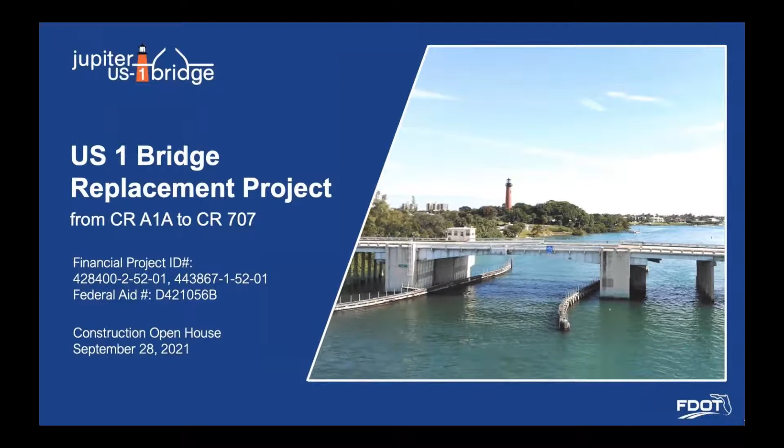The following presentation will provide you with information on the upcoming improvements that include replacing the US 1 bridge, improving intersections, and making minor repairs to the alternate A1A bridge. You will find out what to expect during construction, including the project schedule and traffic impacts. But first, we will introduce the project team, go over the meeting format, and the rules of engagement.

Please meet our project representatives who will be addressing your comments and questions after the presentation. Bodler Barthelemy is the FDOT project manager. Virgil Visaggi, Scott Case, and Tony Grau are members of the team that will be overseeing the contractor on behalf of the department. Angel Gardner is the community outreach specialist who will provide ongoing information to the public on the project's progression. Also with us tonight is Bing Wang, FDOT's design project manager, Mike Salino and Sybil Bayard, the engineers of record, Steve Hedge with the design team, and Kyle Humphreys, the contractor's project manager for this project.

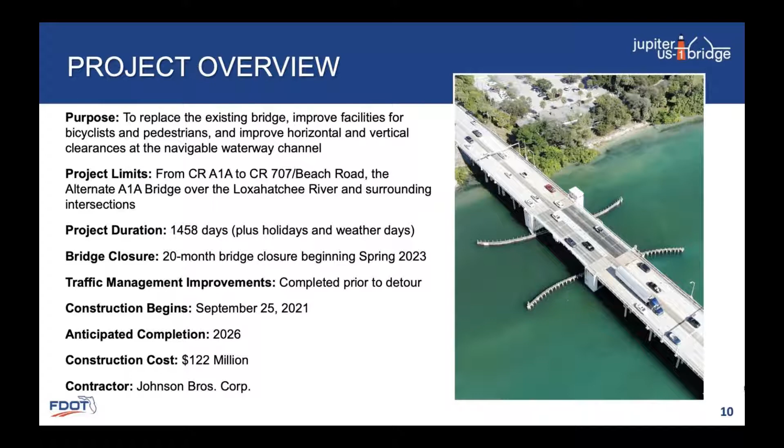To limit the duration of bridge closure, FDOT is providing cash incentives to the contractor to end the detour in less than 20 months and open one lane of traffic in each direction on the new bridge. The contractor also faces disincentives if the detour exceeds 20 months. In addition, no excuse bonuses are available to the contractor to open 2 lanes of traffic in each direction by November 2024 and to complete the project within the original allotted time.

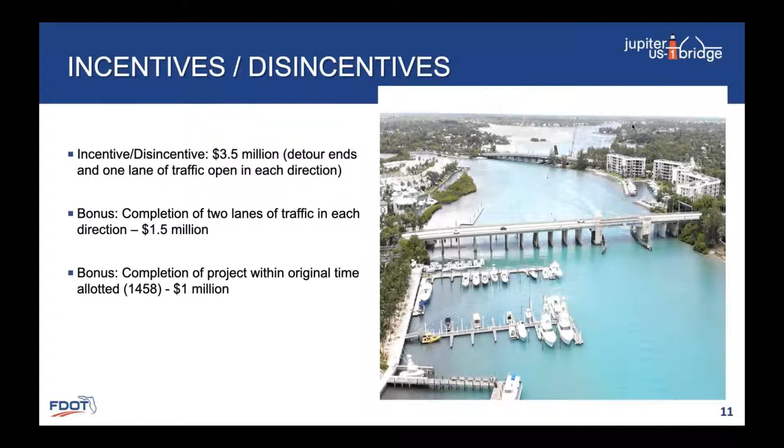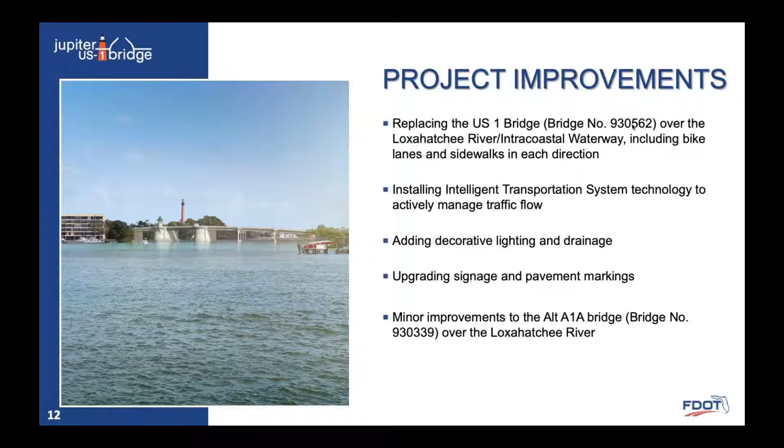The US 1 bridge replacement project consists of replacing the 4-lane drawbridge, including sidewalks and bike lanes in each direction. Improvements also include installing intelligent transportation system technology to manage traffic flow. New decorative lighting and drainage will be added. Signage and pavement markings will be updated. Minor repairs will occur on the alternate A1A bridge over the Loxahatchee River.

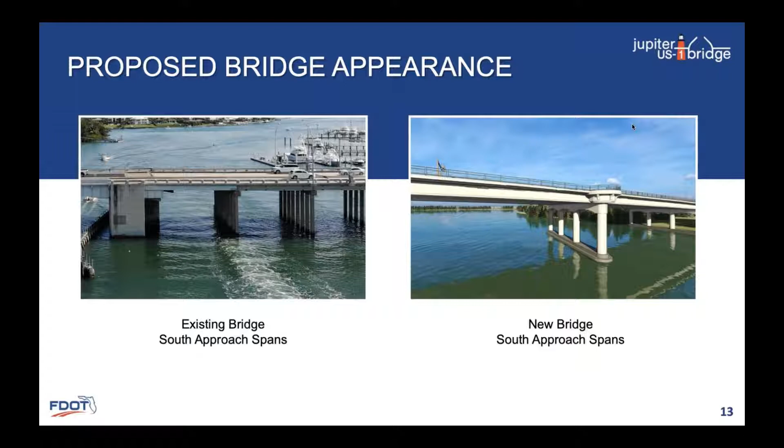The proposed bridge will feature fewer intermediate piers. This will provide an elegant, open, and cleaner appearance with less visual obstruction of the channel and surrounding area. Fewer bridge piers will help improve channel flow and reduce erosion.

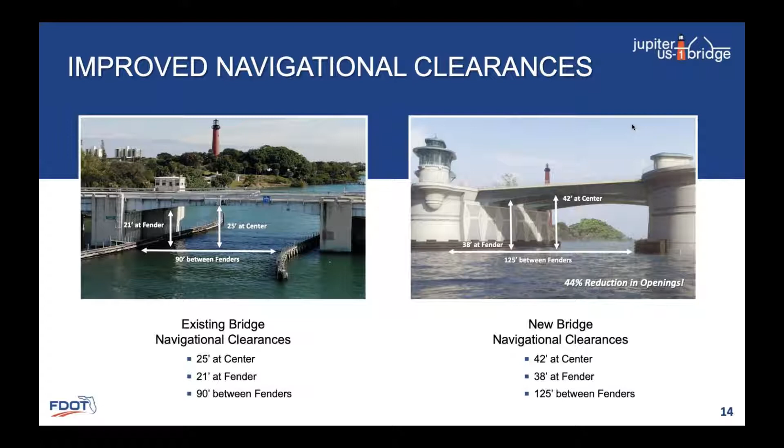The new bridge will provide improved navigational clearances at the channel, with 125 feet of horizontal clearance and up to 42 feet of vertical clearance. The higher vertical clearance will result in an approximately 44% reduction in bridge openings, improving traffic flow on US 1. The new bridge will also feature a concrete bridge deck to reduce traffic noise.

Protected pedestrian walkways with overlooks will be included, connecting the Riverwalk to the Jupiter Inlet Lighthouse and Museum. A new observation deck will be constructed under the replacement bridge.

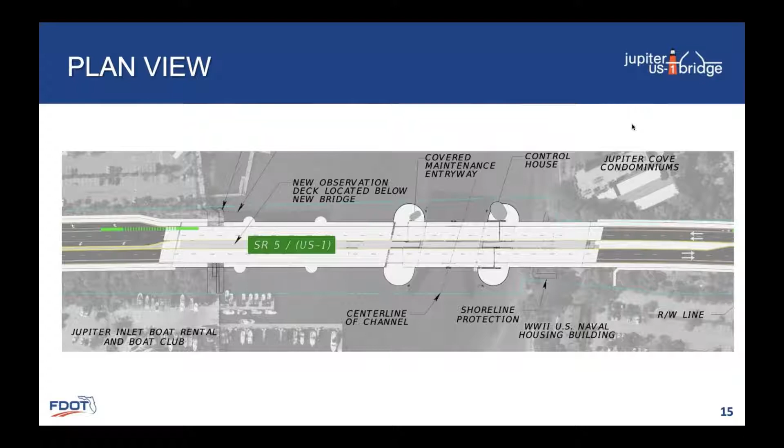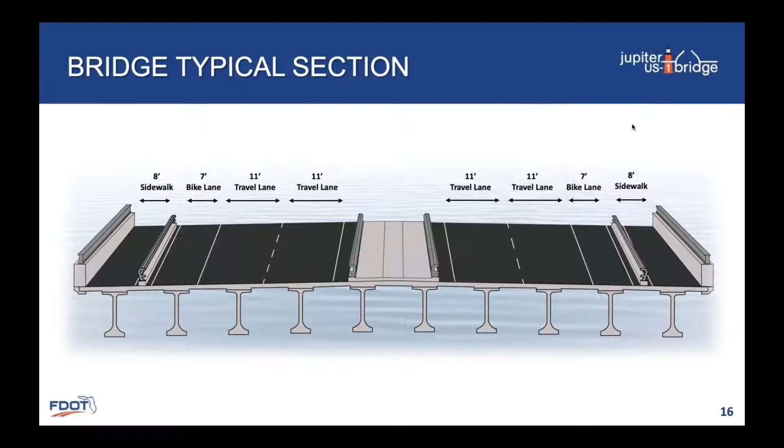The US 1 bridge will be closed for approximately 20 months, beginning in spring 2023, with traffic detoured to alternate A1A. Lane closures may occur 9:30 p.m. to 6:30 a.m. Sunday through Saturday on US 1, Indiantown Road, alternate A1A Beach Road, and Old Dixie Highway.

Access to adjacent properties will be maintained. Pedestrian and bicycle access will be maintained along the detour route. Marine traffic will be maintained through the navigable waterway. Channel restrictions may occur.

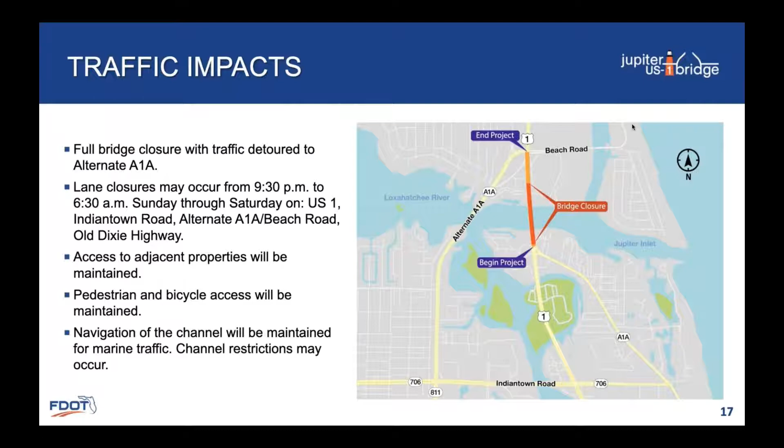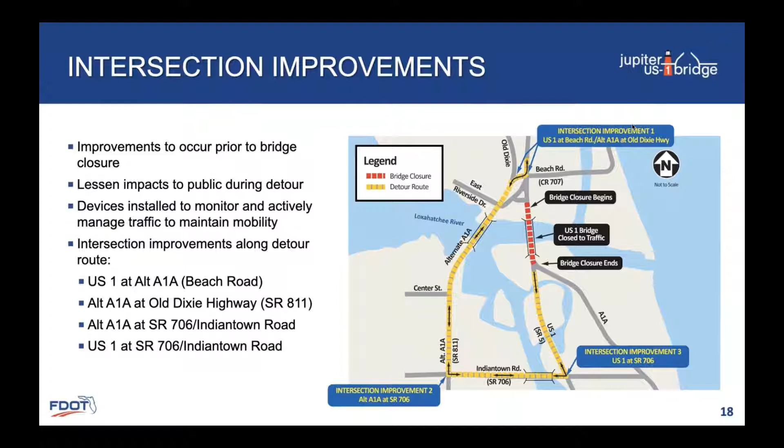Here is an overview of the intersection improvements that will occur along the detour route prior to the bridge closure. Intersection improvements will occur at US 1 and State Road 706, Indiantown Road, at alternate A1A and State Road 706, Indiantown Road, and at alternate A1A and Old Dixie Highway. Traffic management devices will be installed to actively manage traffic and maintain mobility.

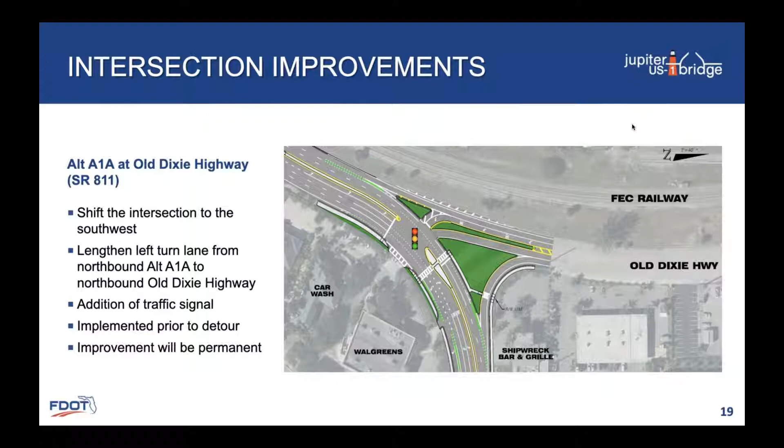Permanent intersection improvements will occur at alternate A1A and Old Dixie Highway, consisting of shifting the intersection to the southwest, lengthening the left turn lane from northbound alternate A1A to northbound Old Dixie Highway, and adding a traffic signal.

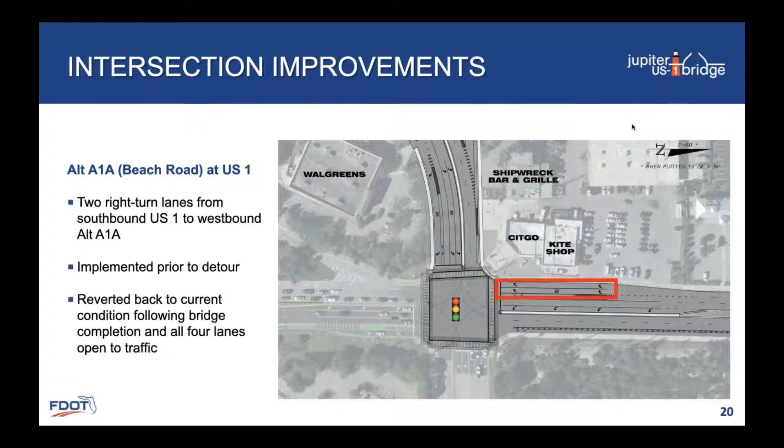The temporary intersection improvement at alternate A1A Beach Road and US 1 consists of adding a second right turn lane from southbound US 1 to westbound alternate A1A. A temporary third left turn lane will be added from northbound US 1 to westbound Indiantown Road at US 1 and Indiantown Road.

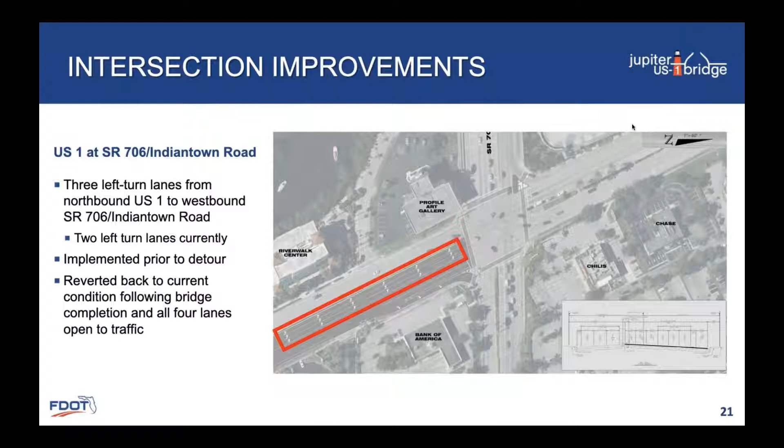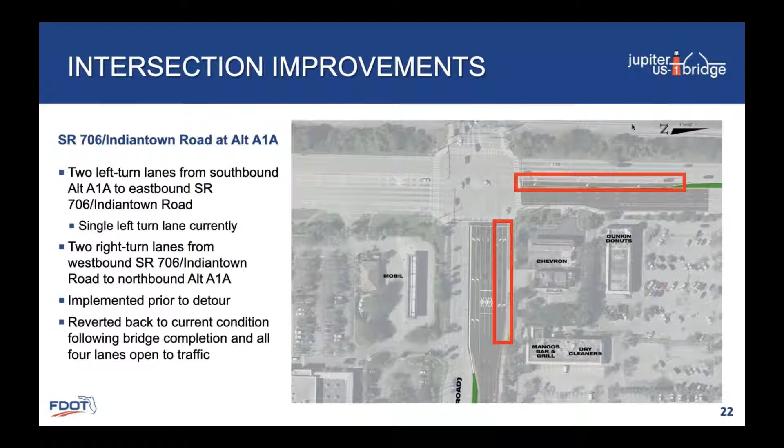The temporary intersection improvements at Indiantown Road and alternate A1A consist of adding a second left turn lane from southbound alternate A1A to eastbound Indiantown Road, as well as having two right turn lanes from westbound Indiantown Road to northbound alternate A1A.

Active traffic management and monitoring will occur along the detour route with the installation of intelligent transportation system devices. These enhancements will allow FDOT and Palm Beach County to monitor traffic 24/7. The ITS system should help improve travel times, alleviate congestion, allow real-time adjustments to traffic signal timing, and allow advance notification to the public of traffic delays.

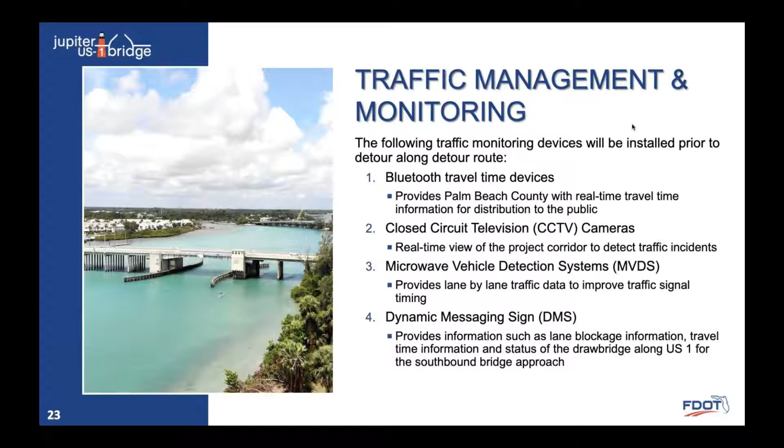Prior to the US 1 bridge detour, minor repairs will be made to the alternate A1A bridge over the Loxahatchee River. There will be no impact to marine traffic during the repairs. Lane closures will occur.

Detour and work zone signs will be placed north and south of the work zone. Residents should anticipate increased noise levels during pile driving activities. The Town of Jupiter noise ordinance will be followed.

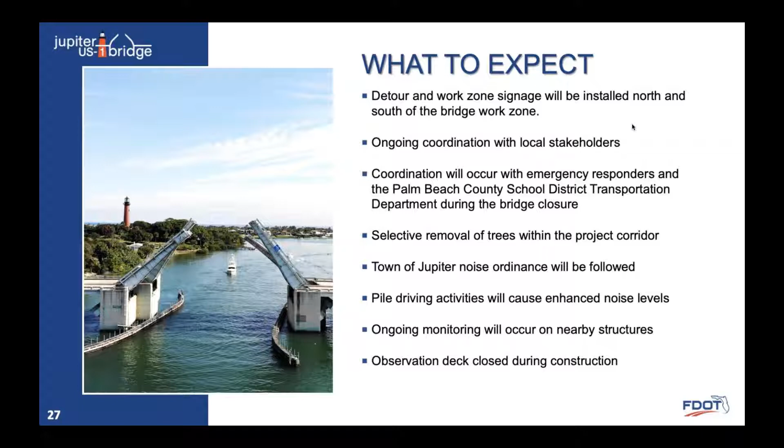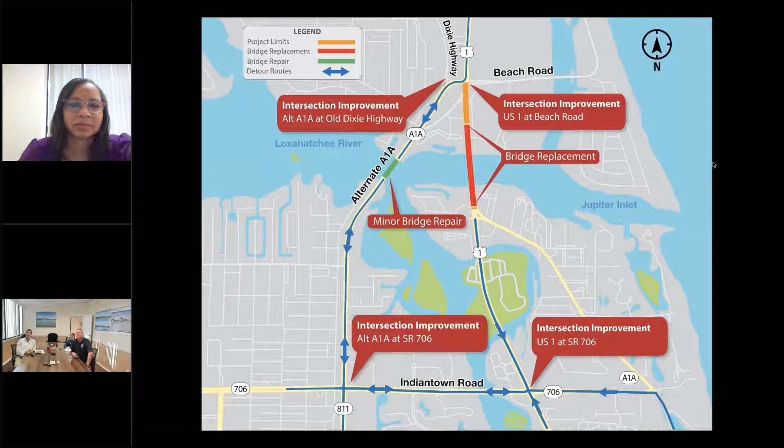Sure, so if I understand the question properly, diagonal was the word used, is that correct? Yes. So assuming the questioner is referring to relative to the channel, right? He's asking about the channel, yes. So can you bring up a slide? Let's give an opportunity for some pictorial reference here, if you can. So it must be relative to something shown in the virtual presentation. So let's have a look to see what might be a question.

So the new bridge—Mike, I think you're referring to the intermediate piers. So if you pull up the attachment, the rendering, then you could talk to that. Yes, I have it up on my other screen.

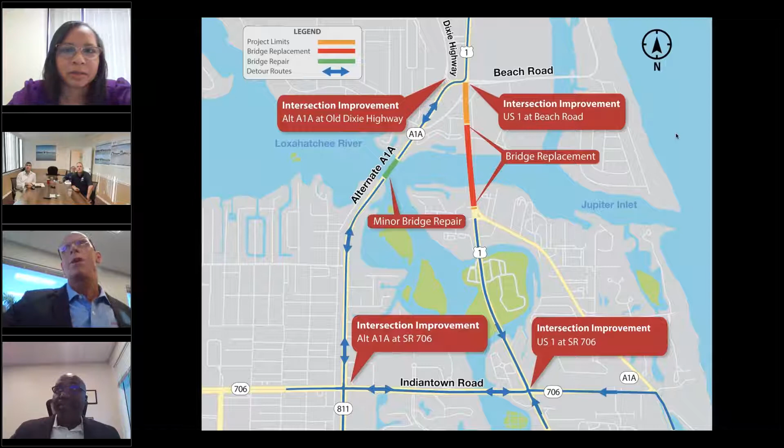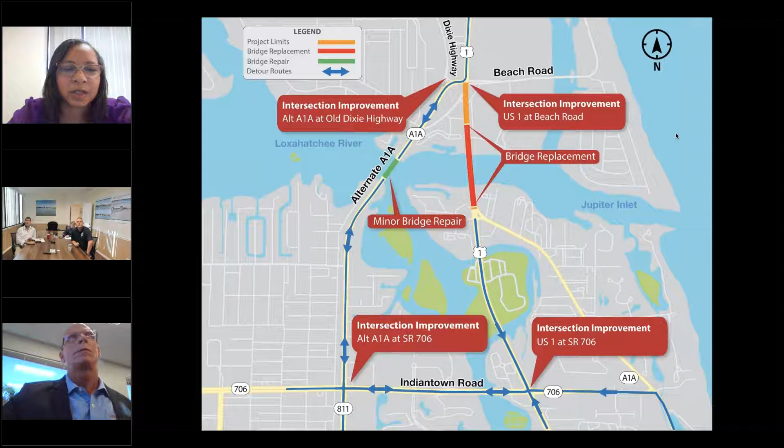So he has a follow-up question as well, Mr. Smith: are there any underwater obstructions between pylons that would prohibit navigation outside the channel?

So there we go. The U.S. Coast Guard encourages use of the navigable channel. One of the things that's going to occur prior to the detour phase and prior to demolition of the existing bridge is to remove some of the old remnants of the pre-existing bridge that might still be there, or whatever else is at the bottom of the channel. Our team did a bathymetric survey during the design phase, identified some of the objects that might be on the bottom of the channel and the river in general near the bridge, and those items will be removed and cleaned up. Again, the navigable channel is really what vessels should be using to pass through. But to answer your question, debris will be cleaned up from the bottom of the channel.

Now, during construction, we have divers going in the water, I want to say in about two weeks, just to verify everything that's in the water so we can tell the contractor to remove it. Then at the end of the project, we're going to have divers again to ensure there's nothing remaining in the water or that the contractor did not drop anything. So to answer the question, there'll be nothing preventing boaters from going outside of the designated channel by the bridge, underneath one of the intermediate piers.

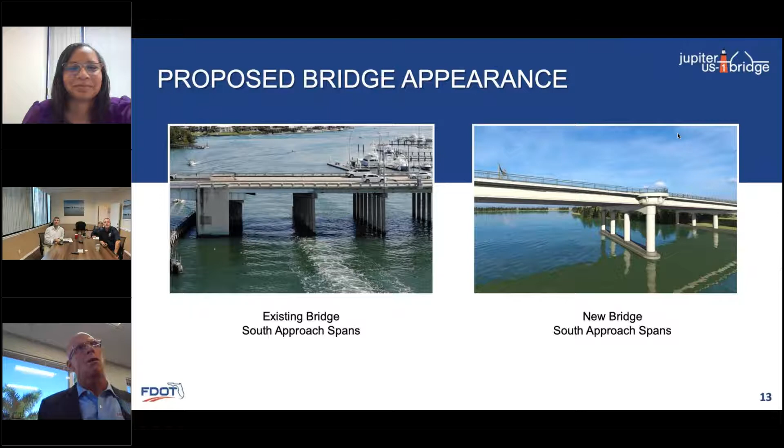Yeah, I realize that now, Steve. Thanks. I think the questioner was asking why the piers are slanted, or the angle of the piers in line with the flow of the channel, and that's exactly the purpose. That's to improve the flow—it's a hydraulic design improvement. It's a goal you want with a new bridge design.

And the piers are rounded, for your information, just to help with vessel collision design in the new bridge. The rounded edge gives it better vessel collision resistance, able to withstand vessel collision better and protect the vessel and the bridge.

Okay, I hope that answered your question, Mr. Smith. Let us know, and if we need to come back, we'll come back to you. But thank you for those responses.

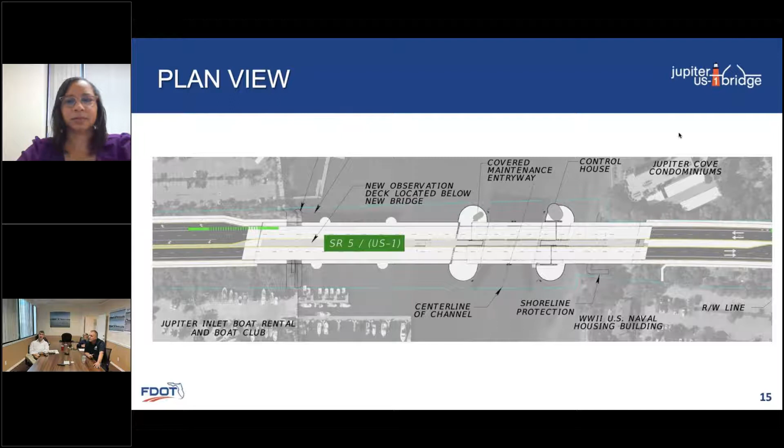Yes, the town actually has two upcoming projects, one on Indiantown Road and one on County Road A1A. Those projects are going to be started early next year based on our conversations with the town. They are supposed to be finished in early 2023, with the majority of their work done by the time we get to our detour phase. There may be slight overlap, but it shouldn't affect the flow of traffic along Indiantown or through alternate A1A. And I'm sure we'll be coordinating with the town as those projects are progressing. Correct.

Okay, thank you for that. Our next question we have is from Sheldon Geweiser, please excuse me if I pronounce your name incorrectly. Sheldon asked: please tell us exactly what changes will occur on the entrance to 1000 North properties, including the condominiums and townhomes. What elevation changes will be made to the road and what will be done to improve the drainage? I know that's a very important concern for the folks at Jupiter Harbor.

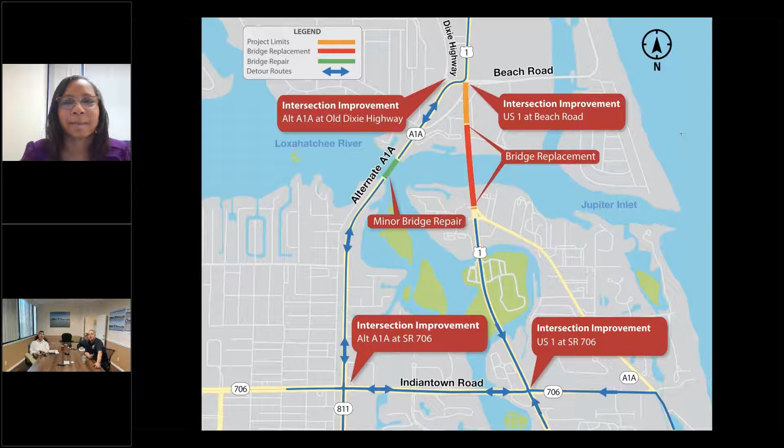Virgil, can you or Scott address that? I'll let Scott address it. So while the Jupiter Bridge, the new bridge, will be raised at its main span location, it will slope down gradually back to grade on both the north and south sides. At 1000 North, the vertical change will be minimal, but you will see an MSE wall from the landing going towards the bridge to address the rise. But at the entrance to 1000 North, we should be back at grade by that point.

And the drainage improvements that we're doing for the entire project are actually there to improve the water quality for the entire system and surrounding area. Because right now, currently, the water on the existing bridge drains through scuppers that go right into the Loxahatchee River. Our drainage improvements will capture that water from the bridge, from the traveling public, and route it down to new drainage swales that will treat the water before it gets discharged back into the Loxahatchee River. So that's how we're improving water quality on the project through our new drainage improvements and addressing the vertical rise with the MSE walls, sloping it back down to grade.

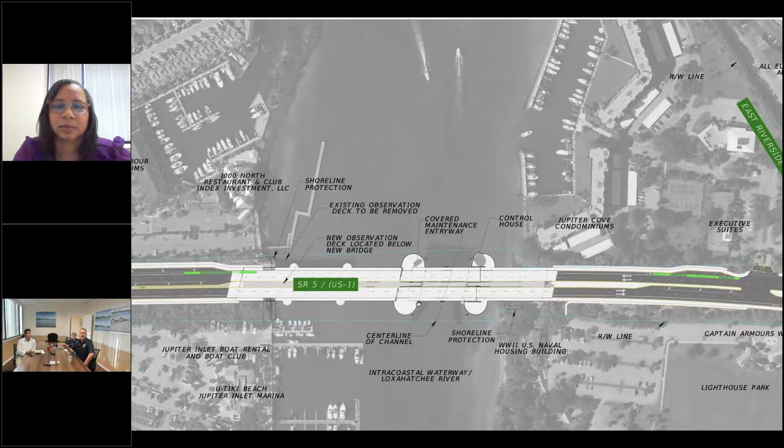Next to the Jupiter Cove condos, as you come off the bridge, the reason there's not a noise wall per se is because there's going to be an MSE wall taking traffic down from the bridge at that point and down to grade. That itself acts as noise protection, along with the existing vegetation between the existing structure, which is basically getting put back in the same footprint. So between there and Jupiter Cove, that combination is why there are no additional walls being built at that location.

It's mainly because it did not meet the requirements of the noise study to put any further noise abatement at that location. One improvement DOT is doing that relates to noise is putting a closed bridge deck on the bascule trestles. Right now, if you're on your patio at the condo, you get a lot of noise from the open grate out there. We're going to close that off, so you won't get that huge tire noise you presently get — it will actually be a reduction.

Thank you for that. So when you say MSE wall, Scott, what you mean is like a retaining wall, basically — is that correct? That's correct.

I believe what Ms. Capodanno was referring to is why isn't the MSE wall extended further south so they have some privacy between the bridge abutment and their condos, located at the easternmost part of Jupiter Cove. The MSE wall has to be designed to take tidal surge, so we had to pull back the abutment and walls as far as we could while still providing some privacy to Jupiter Cove. There was a give and take between design standpoint and potential coastal surge situation.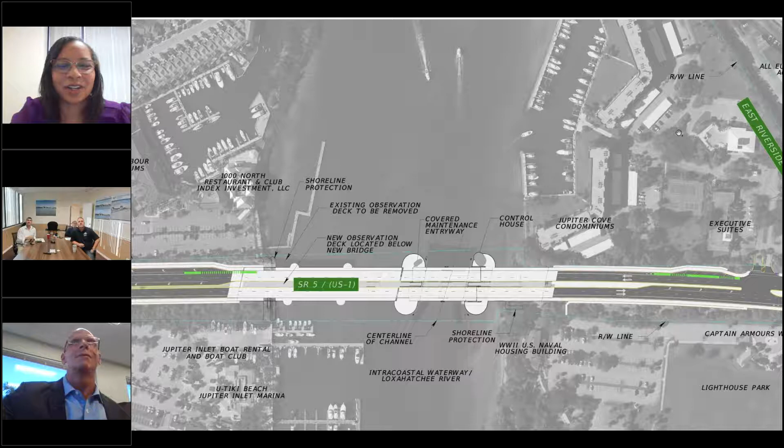We have another question here from Ms. Riccardi again: what is the proposed pile driving method for installing the bridge piles? There's someone else who knows what they're talking about. Virgil or Scott, can you address that? What was the question, I didn't hear. Pile driving method - what's the proposed pile driving method for installing the bridge piles?

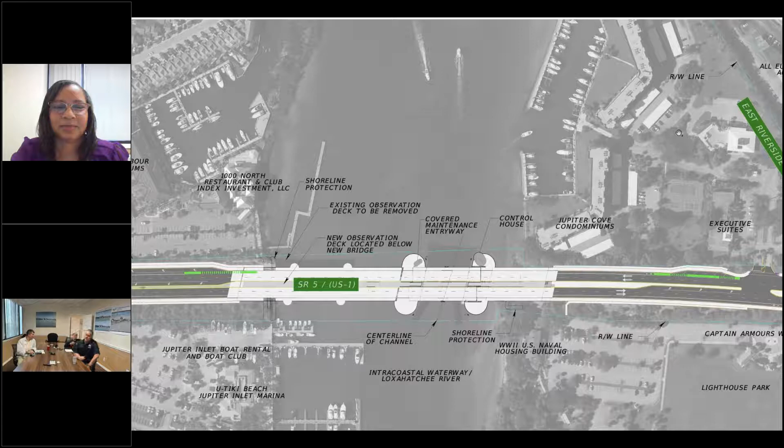Well, let's roll this back for a second. There are two different foundations on this bridge - we have drill shafts and pile driving. Tony, you want to go through in detail? Yes, the drill shafts we're going to be installing on what I guess will be the north abutment, and those are just going to be strictly for the north abutment.

The rest of the bridge will all be driven piles. We're going to excavate and drill down to an elevation that will minimize vibrations as we drive the piles. So safety and vibration monitoring are key to maintaining the existing structures, so we don't cause any damage to them.

So what he was saying is we're going down to 55 with the casing. We're going to drill all the material out of the casing, place the pile in the case, probably drive it 20, maybe 30 feet from there, take the case out, and now fill all the voids with clean sand. That's going to be the majority of what you see happening out there at all the piers in the waterway.

So will that pre-drilling help with, like Tony mentioned, reducing vibration? What about noise? Will that make any difference?

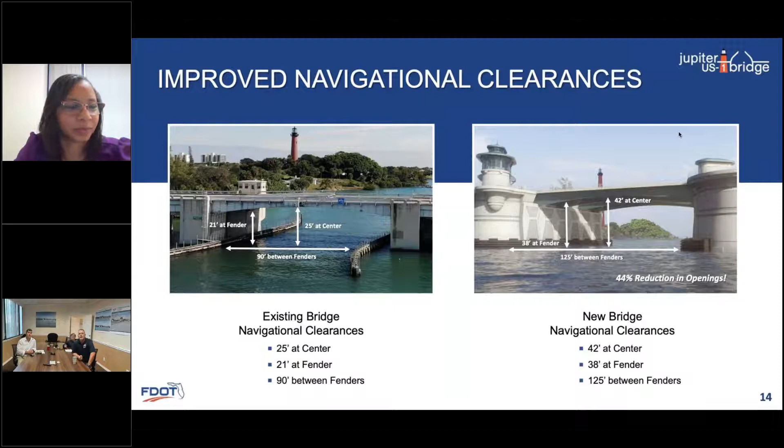Yes, it will, because a lot of what you're drilling through, when you put the piles in the ground, you have to have a certain depth for lateral stability of your foundation. And in order to get down to those depths we need, there are a lot of soil layers you have to go through in order to consider bearing. Some of those layers have some hard driving through them. So we're going to be drilling through that so it minimizes noise, minimizes vibration, and the only impacts you're going to feel are when we're actually in the layers we're considering for bearing.

But as far as vibration, obviously the deeper we go, the less vibration impact you're going to feel. But you will still hear the noise of the hammer as we're driving a pile. That we can't change. The duration is shorter though. Instead of hearing a 20-minute or 30-minute duration of hitting on a pile, you're now going to be going 10 minutes or so, for example.

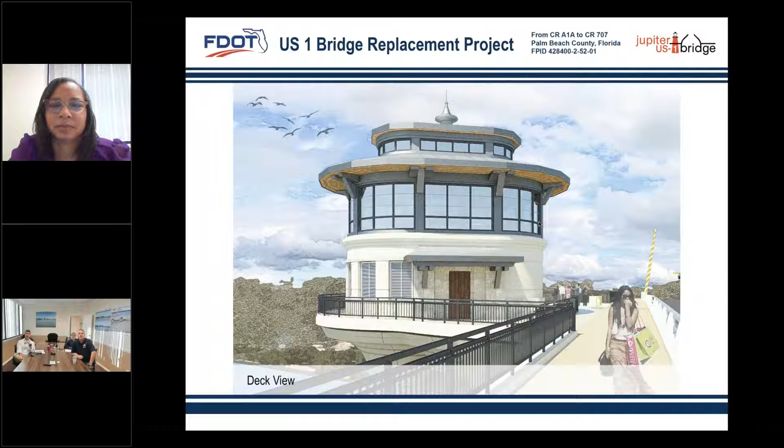Yes, the observation deck will be demolished and turned into an artificial reef out in the ocean. We will be putting a new observation deck underneath the bridge itself, which will be connected to a new river walk that we'll be developing. That's a good rendering right there of the new observation deck that we're putting in.

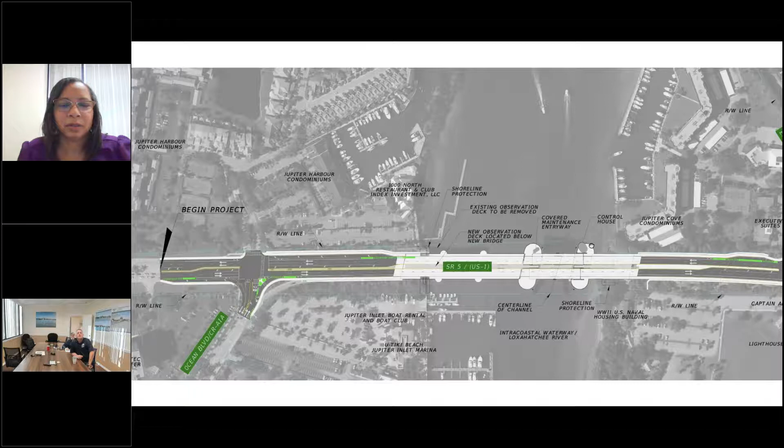Another question here, just give me a second, the system is a little slow so I'm trying to scroll up. This is from Richard Bavilo, and it's a long question: I live on Village Boulevard. Has a traffic study been done as to the impact this project will have on residents traveling west on Village Boulevard, trying to make a left turn onto Dixie Highway?

Vehicles traveling south on US 1 from Hobe Sound will be making a right turn onto County Line Road and then a left turn onto Dixie Highway to avoid the US 1 traffic. Without a stop sign or light at Dixie Highway and Village Boulevard, it will almost be impossible to turn left from Village Boulevard onto Dixie Highway. Has anyone studied this potential traffic problem?

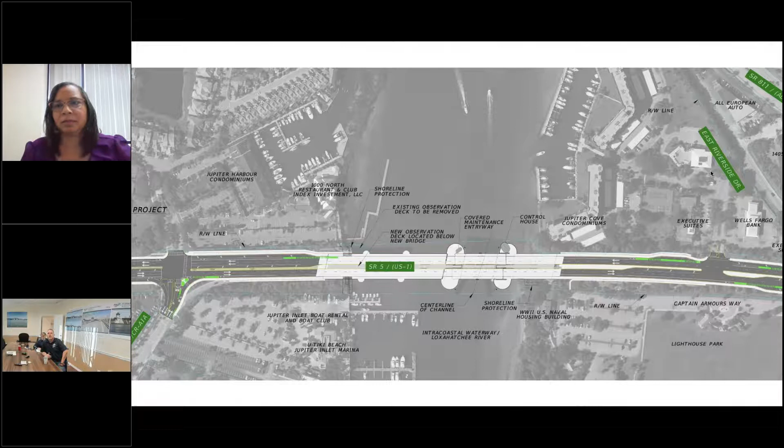Yeah, so I'll answer that. The traffic studies performed for the project analyzed the flow of traffic going through and connecting from our project limits, which is just north of alternate A1A, and connecting it back over to Indiantown Road and back over to US 1. That traffic study also looked at Old Dixie Highway, taking it from that interchange and the traffic coming in there and going back over alternate A1A and back over to Indiantown Road.

Based on those traffic studies and the flow of traffic through the area, the results came up with the addition of turn lanes at the major intersections within the detour route, and also the modification of the Old Dixie Highway and alternate A1A configuration to realign it and move it slightly to the west, adding signalization improvements at that intersection for both safety and vehicular movements, increasing the left turn movement for northbound traffic on alternate A1A to access Indiantown Road. Outside of those project limits, the traffic study did not warrant any further changes beyond the improvements incorporated in this project.

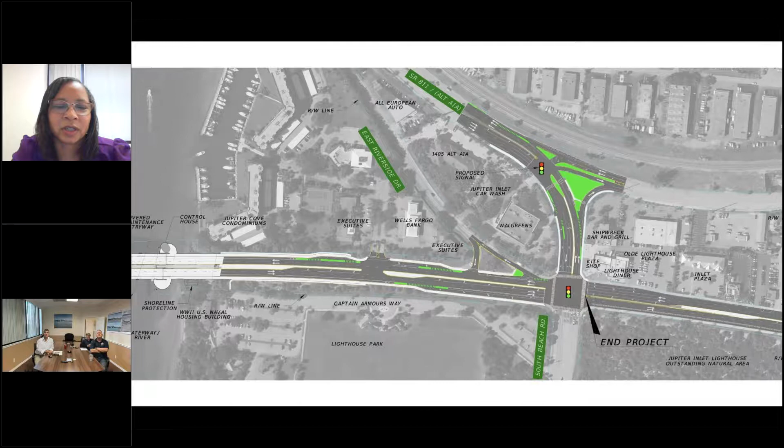The next question is from Chip Block. His question: currently there is a dedicated right turn lane from alternate A1A heading east onto US 1 to go south. Can we make that lane into Beach Road to alleviate congestion on the second lane that goes straight into Beach Road? I think he's asking for a through lane. At this meeting we can't give you a definitive answer, but it's something we can research to see if it's feasible. We'll follow up with you, Mr. Block, on that question and make sure to get back to you.

We have another question from Geraldine Sligar. Her question: what arrangements and communications are being made for emergency vehicles going to Jupiter Medical Center and other medical facilities? It's a very good question.

We've already met with the town of Jupiter and the village of Tequesta, and their emergency responders, to discuss the best ways to get them through the detour and through the construction traffic. Some of what we've discussed includes dedicated lines to our staff and to the smart work zone TMC, where they could potentially change signal timing as emergency vehicles respond, or bring additional resources you'd normally see on the interstate into our project corridor so they can respond to and clear incidents as fast as possible. We're working with local agencies and agencies from throughout the county to improve response and traffic flow for emergency responders, so you guys will not see any delays in service. As mentioned, there's been quite a bit of coordination with first responders for some time now, so they're very familiar with the project, and that coordination will continue throughout.

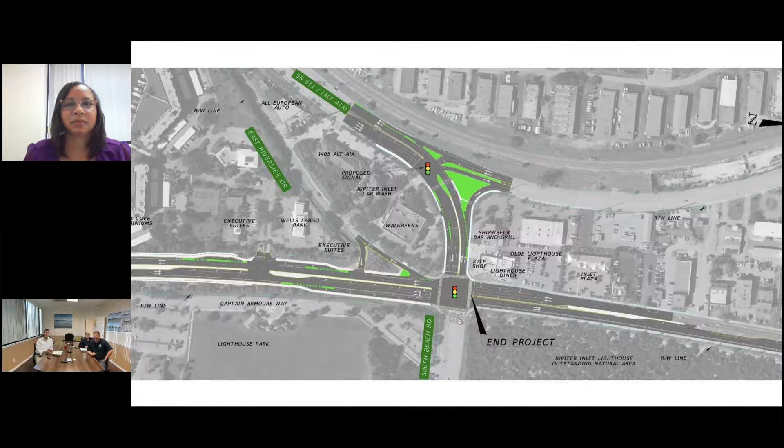We're going to be doing repairs to the cap on one of the piers, which is small, and some repairs to the deck and joints in the bridge, sealing the decks, but they're very minor in kind. The pier is on the south end of the bridge, close to the water. We'll be doing some minor spall repairs and cathodic protection on that pier, and replacing some of the pourable seal joints on the upper deck of the bridge. Those are the repairs for the A1A project. The traveling public will see some lane shifts on top of the bridge while we're doing these repairs, because everything will be underneath, but we have to shift traffic off of those areas since they won't be able to carry the load until we fix them to their final configuration.

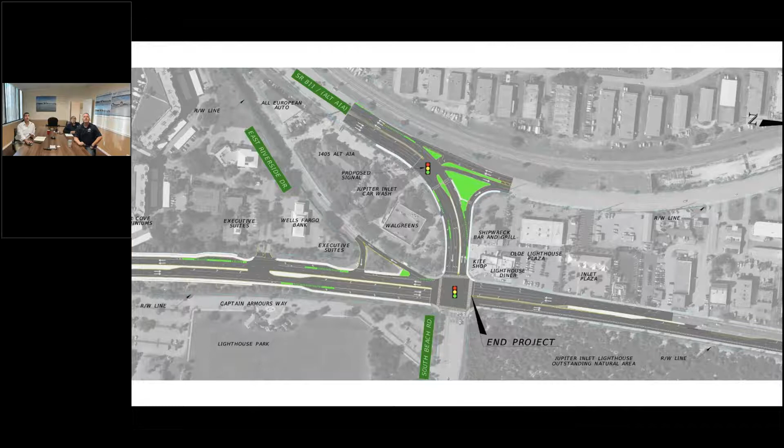Thank you for that, Virgil and Tony. Next question is from Mark Rosalie. He says pier cap will need to be more than -15 below MLW per USACE permitting requirements, can you confirm? Yes, it will be. It will actually be 14 feet below the bottom of the channel per the Coast Guard requirements.

All right, thank you for that. Next question we have, another question from Linda Riccardi. Her question is, will the bascule bridge continue to open upon demand?

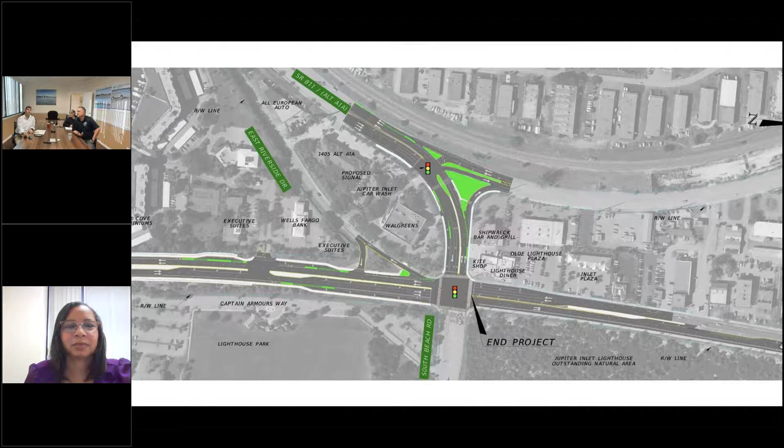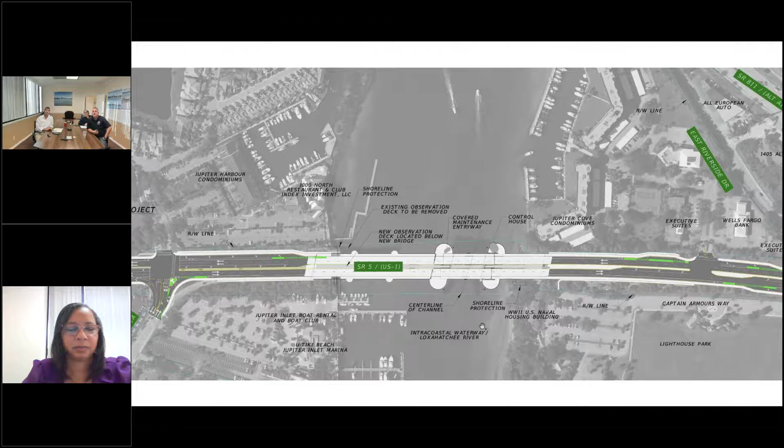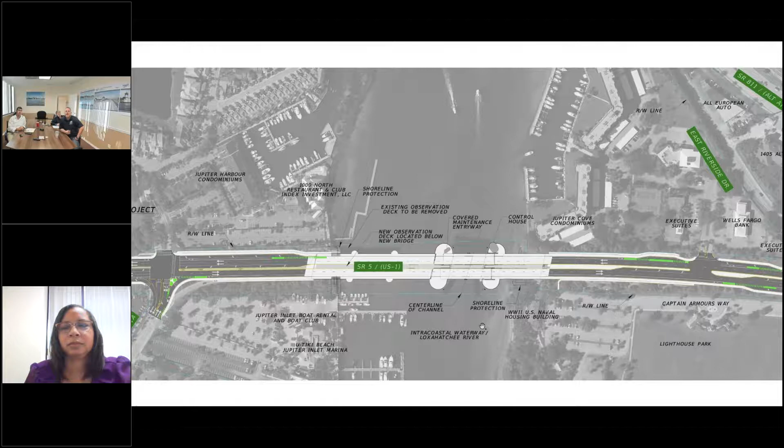Good question, I'm assuming she's referring to once it's complete. I believe she means once the new bridge is in place. Right now it's scheduled to open on demand, but we are going to be talking with the Coast Guard to potentially change that. That's something we have to discuss with them later in the life of the project. Keeping in mind these improvements we're doing to the bridge, raising it up, reduces the amount of openings by 44%. So there may be justification to go to more of a scheduled time opening, but right now that decision hasn't been made final.

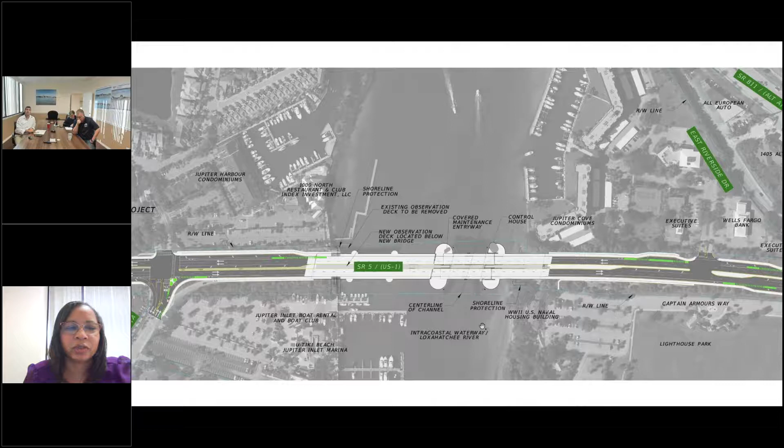Okay great, thank you for that. Commissioner Block, Vice Mayor Block is following up. Can the dedicated right turn lane from A1A to US1 be repurposed for either right turn or straight toward the lighthouse, Beach Road, with a merged traffic sign on Beach Road? I think it potentially could, but it's something we have to research with DOT and the EOR, so we would have to follow up. Personally I think it might be a good idea, but I can't commit to it at this time.

Thank you, Virgil. So another question we have is, will there be a staging area for construction materials outside of the project area? If so, where will it be located?

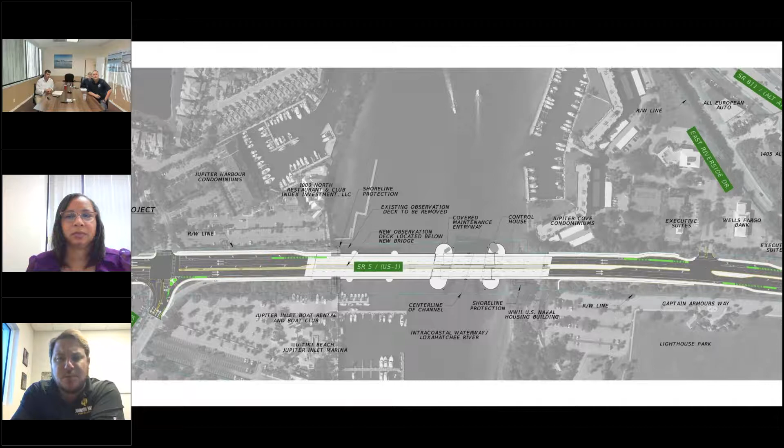Kyle, can you answer this question for us please? Yeah sure. We'll be staging in a couple locations. One is just south of the job site, it's called Pyatt Place, it's just west of Burt Reynolds Park. There's a small area owned by the town of Jupiter that we're going to be putting an office and have some parking for the project staff. We'll also be staging in the Port of Palm Beach, that's basically a small marine hub for us here in the area, and the rest of the staging will be done on the job site.

Okay, thank you for that, Kyle. Next question we have is from William Fravel, I hope I'm pronouncing your name correctly. His question is, is there a risk management plan that has identified the highest risk and risk mitigation plans?

Virgil or Scott, can you answer that question? So we have gone through the project and identified the items that are going to create the biggest risk. The DOT has gone through and tried to mitigate some of that risk. One of the big things is vibration, by going to a different type of technique than normally used, putting casing in and drilling down to negative 55 feet, we get to reduce one of the biggest risks that we foresaw in the project.

Just to follow up with what Virgil was saying, all this risk assessment was done during the design phase and PD&E phase to analyze the project, the intent, the improvements, the risk, to come up with the design that has now moved forward for this project.

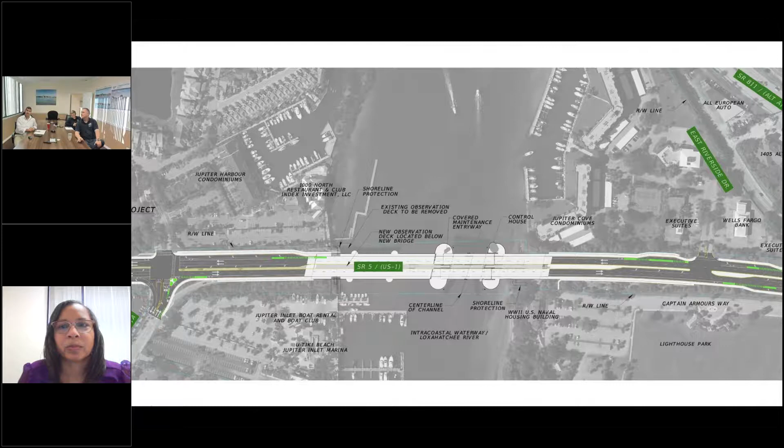We can deter people using MOT devices, but it really comes down to enforcement of the rules that will be in place. The signage for northbound Riverside Drive is going to be signed for through traffic only, with no northbound movement once you pass the entrance to Jupiter Cove, that little east-west driveway. Everything on US 1 will still be under construction.

There's going to be a dedicated area specifically for the residents of Jupiter Cove and the businesses to get in and out. So going that way is not going to add any additional time to their travel, because movement through it is going to be so restricted.

To back up what Berta was saying, we can't stop traffic from moving through a particular area because we have to maintain access to the local communities and businesses through the area at all times during construction. But on these local side roads, we do sign it for through traffic only.

Thank you, and that will have barricades there as well, is that right? We'll have barricades closing the northbound movement just north of their drive.

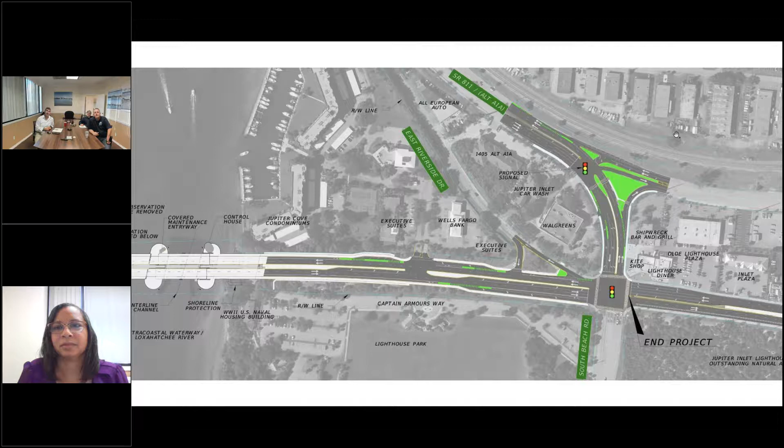We'll look into it, yes. I completely understand. Basically, you want to turn the outside lane, which is currently configured as a right turn lane, into a right turn plus through lane on the east side of US 1 for alternate A1A, and then on the west side, potentially stripe that as a through lane plus a merge lane once you get to Beach Road and make that turn north. Correct. Okay, we'll bring that request to DOT, and we'll possibly also have to bring it to Palm Beach County because we don't maintain Beach Road, but we'll see what we can do for you. Thank you, I'd be happy to help lobby Palm Beach County. Okay, thank you so much. We'll find out DOT's position and get back with you. Thank you, and thank you for this very illuminating webinar. It's been very helpful.

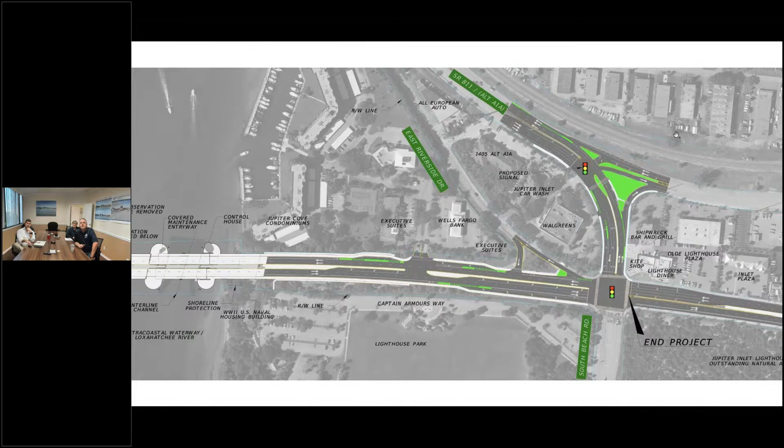Okay, thank you for those responses, Virgil and Scott.

I have an environmental question from Jennifer Laxner: how will manatees and sea turtles be protected during construction? Virgil or Scott, can you address that?

We'll start off with manatees. During any marine activities, including moving a barge, the contractor is required to have a dedicated spotter for manatees. If a manatee is seen, we have to cease construction for at least 30 minutes so the manatee can leave. We're also not allowed to do this work at night because we have to be able to observe what is coming into or through the construction project.

When it comes to sea turtles, the biggest thing is turtles being attracted to lights at night. All of the lights have already been reviewed and approved by FWC, the Florida Fish and Wildlife Conservation Commission. They reviewed all of the plans and specified what type of bulbs we're going to use, and shrouds that prevent any light from the bridge from shedding off of it. During construction, the contractor has to point his lights away from the water during any nighttime activities, which will be very limited to maybe 1, 2, or 3 operations during the entire life of the project.

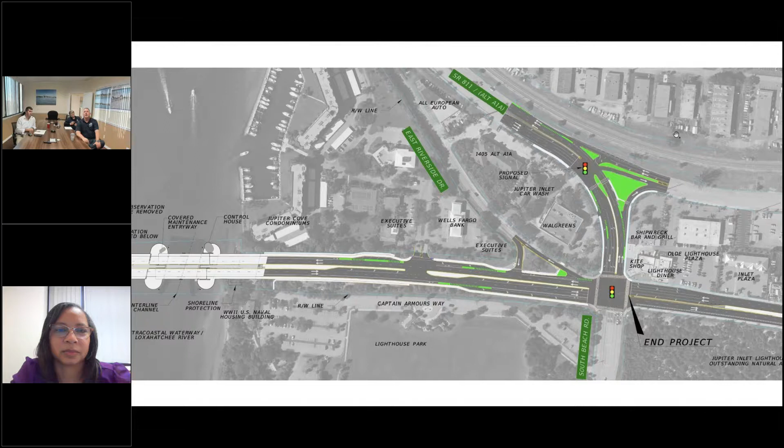Traffic from A1A, US1 at the detour will be able to access US1 and go south to Indiantown Road, back to alternate A1A to get to the other side of the bridge. If you need to access any of the restaurants, or get to 1000 North, you can still access that. You just won't be able to go across the bridge.

So in order to go across the bridge to access anything over into Tequesta, you have to make that left turn to go through the detour route for US1 to Indiantown Road, back to alternate A1A, and then back to the other side of the bridge to US1. This is specifically during the detour phase when we close the bridge. Outside of that, the bridge will still be open and US1 will still be open for traffic.

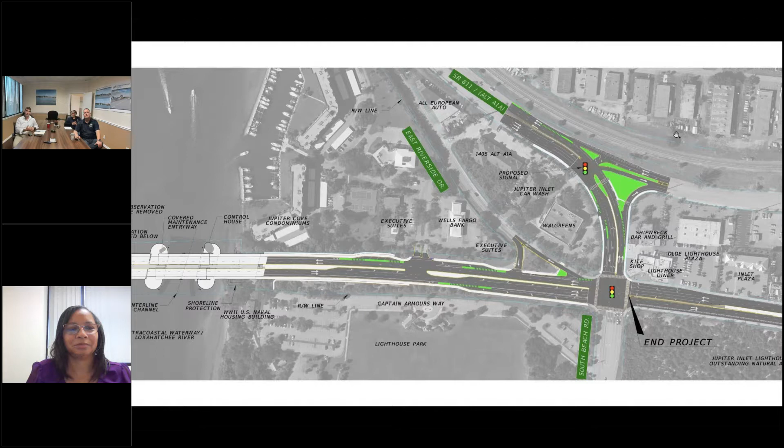During these operations, we're required by the permits to test the water quality above and below - basically prior to, depending on the tides, getting what the background is, and then getting what, as the current goes, the other side of the water quality is. That difference has to be zero. So we're not allowed to have any turbidity in the waterway at all - everything has to be confined. If we have to add more best management practices, more floating turbidity barriers, or change techniques, we will have to do that as the project goes on.